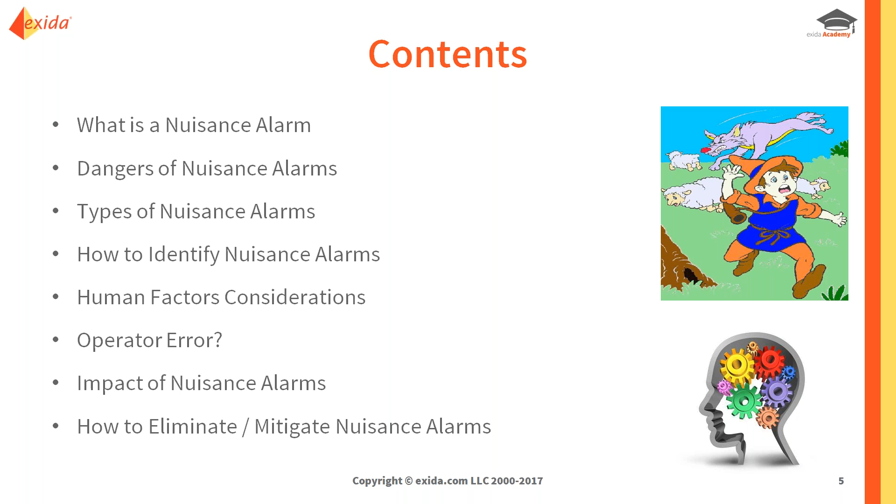For example, how it impacts or creates operator error, and whether operator error is really a root cause of a problem. So let's get started.

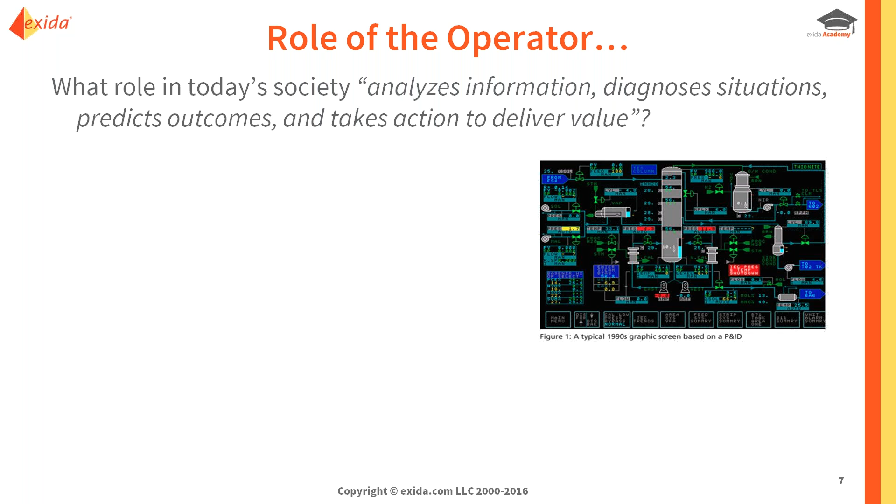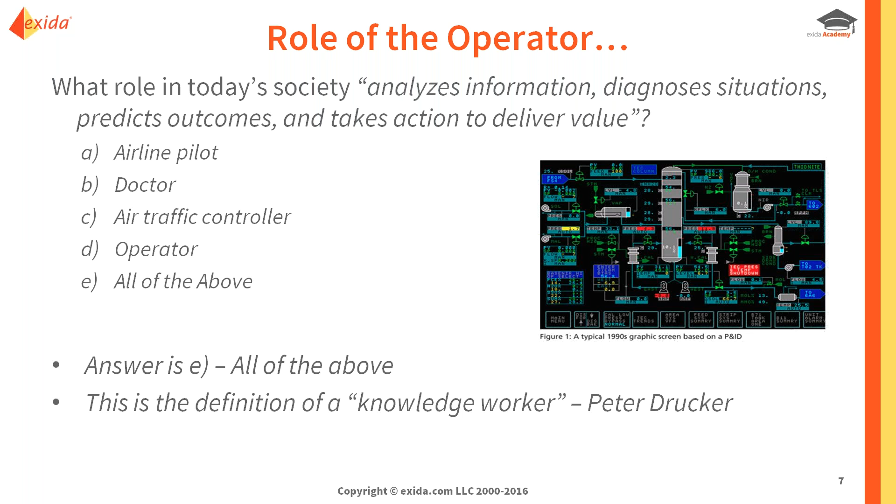First, a question to look at and understand the role of the operator in a process plant. So what role in today's society analyzes information, diagnoses situations, predicts outcomes, and takes action to deliver value? Is it an airline pilot, a doctor, an air traffic controller, an operator, or all the above? That's a pretty easy gimme question, of course. And the answer is all of the above.

The idea of this question is to get you to see how the operator is similar in their role to, let's take an airline pilot or a doctor. They take in a lot of information, a lot of data, and they need to make quick decisions that affect the bottom line of the operation, or the safety of the passengers per se, or the safety of the patient.

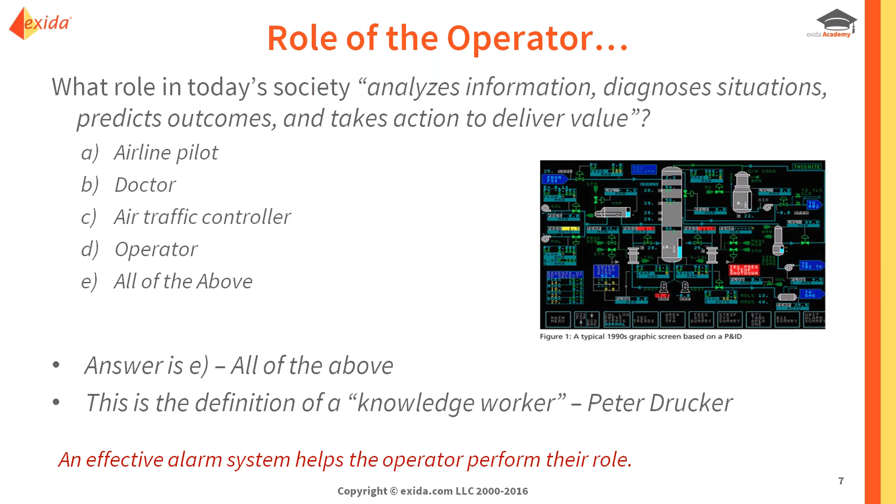So the alarm system is actually a key tool to help the operator do their job, and that's part of what we're going to talk about. So the alarm system is key tool for them to do their job, and alarms are part of that and help the operators know what to do and when. Now, what is the purpose of an alarm?

If we look at this schematic of a typical process upset, during normal operations, the distributed control system is pretty much typically able to keep the process in your normal operating range. However, in some cases, you'll have an upset, a piece of equipment will malfunction, change in operating conditions, all kinds of different reasons that the process will start to deviate and go out of the normal operating range into the abnormal area.

That is when we want an alarm to occur. We want that alarm to indicate to the operator that an abnormal situation has occurred, requires their attention, and that it will guide them to take the appropriate action. And if the operator does that, the process will turn around and go back to the green area, go back to the normal operating range.

If the operator does not respond or does not respond in time, the process will continue to deviate and go out of the abnormal area into shutdown. So that means a consequence will occur, whether it is truly a process shutdown, an SIS activation, or some other kind of consequence. The idea is if the alarm is not responded to appropriately, we end up in that area.

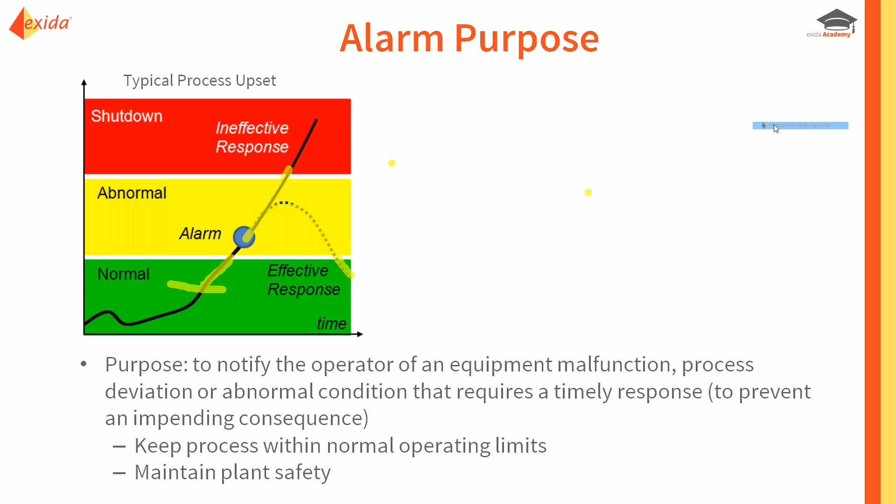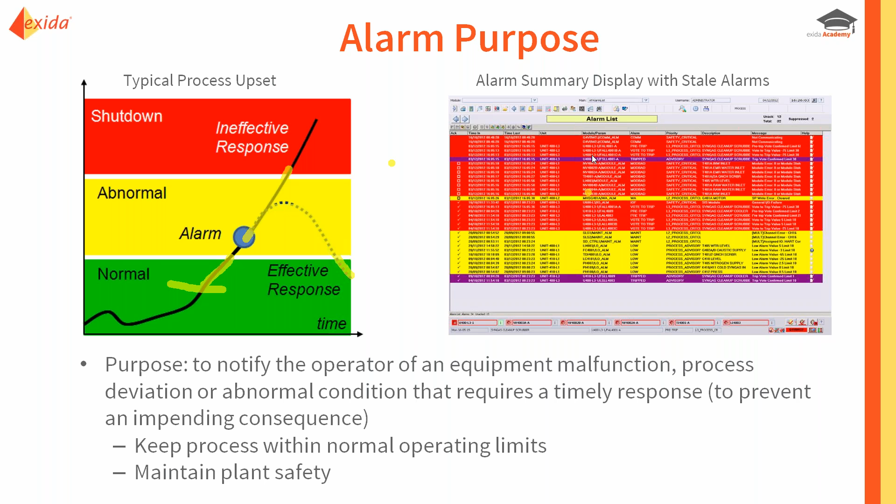That's what alarms are supposed to do. But how often do we see scenarios in a process plant where your alarm summary displays are full of alarms, full of stale alarms, alarms that don't disappear, alarms that are constantly on the console. This is an example showing we deal with alarm summary displays that are full from top to bottom, even continuing on to the next page, because they're so full of stale alarms.

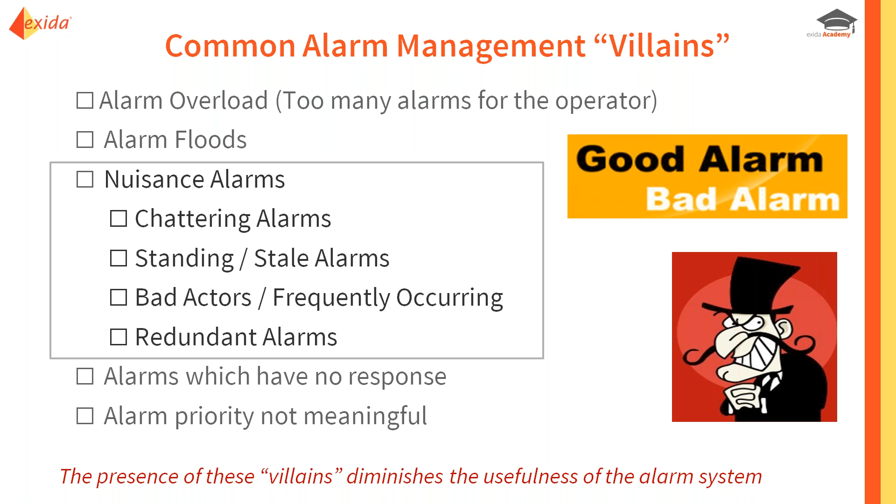So what we are talking about then is, in this scenario, nuisance alarms. There are many different issues, or alarm management villains, that can rob the operator of the benefit of the alarm system. In this seminar, we're going to focus on nuisance alarms.

So let's talk about what a nuisance alarm is, the definition. It is an alarm that annunciates excessively, unnecessarily, or does not return to normal even after the correct operator response is taken. So what does that mean?

That means if you're an operator and you have a new alarm that annunciates, chances are you will respond to that appropriately based on your training the first time that alarm occurs. So let's say you take that response and the alarm doesn't clear. It doesn't go away and nothing happens. Then the next time that alarm occurs, maybe you follow the same pattern.

But at some point, when the alarm occurs, knowing that the alarm doesn't clear and nothing happens, you're going to start to ignore that alarm. And if you ignore the alarm and no consequence occurs, then it becomes fixated in your mind that that alarm is a false alarm or a nuisance alarm. So that effectively desensitizes the operator to that particular alarm, and then in general to all of the alarms from the alarm system. That's a practice or mentality we want to try to prevent.

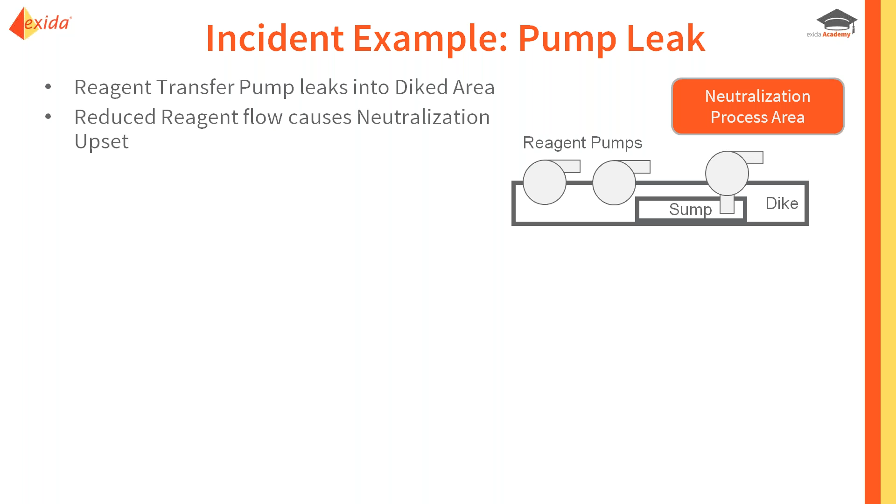We have a set of pumps, reagent pumps, that are transferring fluid into a neutralization process area, and those pumps develop a leak. That leak continues, creating alarms both in the sump area and in the neutralization area. The operator focuses on the upset in the neutralization area, trying to resolve what's going on and take care of the situation.

We have a high level alarm in the sump, and the operator ignores it, focusing only on the neutralization area. Because they don't have a good understanding of the process, they ignore the impact of the sump or feed area, thinking that because it's been a nuisance alarm, there's no need to consider it in the diagnosis and corrective action. So they're not able to correct the process problem.

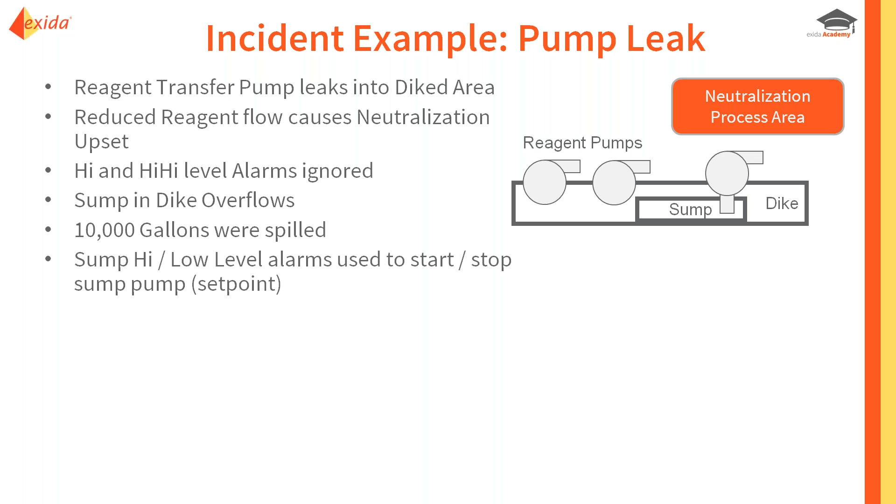Next shift, a new operator comes on and notices that 10,000 gallons have been spilled into the environment. So we wrote a paper and did an analysis of that, looking at the failure mechanisms.

One of the main problems was that the sump, the way it was designed, the alarming, the high level alarm would go off every time the pump turned on to indicate that, so it was used as the pump set point as well. So the operator got accustomed to ignoring that alarm. Then when a high level alarm comes from that same area you've been ignoring, how do you know whether you should respond to it or not?

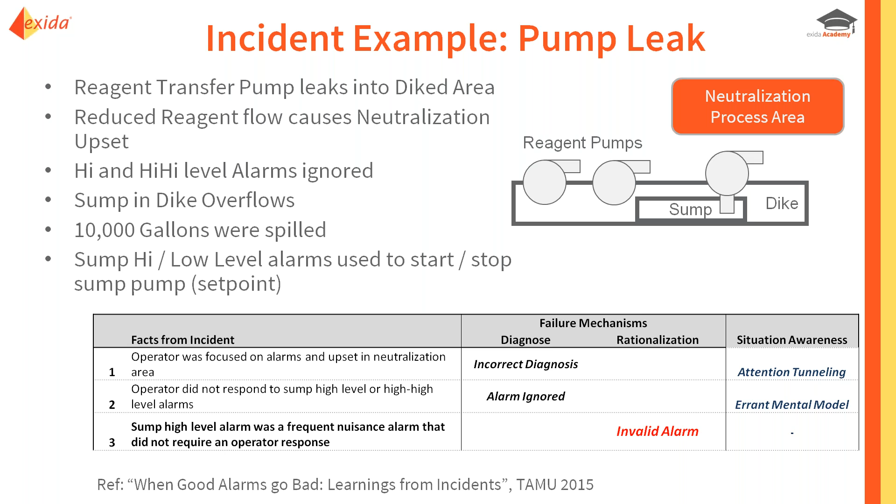The operator basically ruled that out as a source, and their attention was tunneling into the neutralization area only. Because they discounted the sump area as the potential source, their mental model of the process, their understanding or linking of causes and events, was not correct, and they were not able to respond correctly. But it all goes back to the fact that they were presented with high-level nuisance alarms that caused them to ignore that alarm in general.

So how did we get into this situation? Well, in the olden days of panel board control, there was a lot of thought and effort put into what points should be alarmed, because there was a real cost and limited real estate in the control room. Fast forward to today's modern DCS, and alarms are essentially free.

They're in software. It's just a simple checkbox to enable a deviation, rate of change, or high alarm without thought about whether they're truly needed. And if you're not sure whether you need an alarm, what do people typically do? They enable it just to be safe. Unfortunately, that has led to an overabundance of alarming where many alarms don't have a good basis, which has led to nuisance alarms.

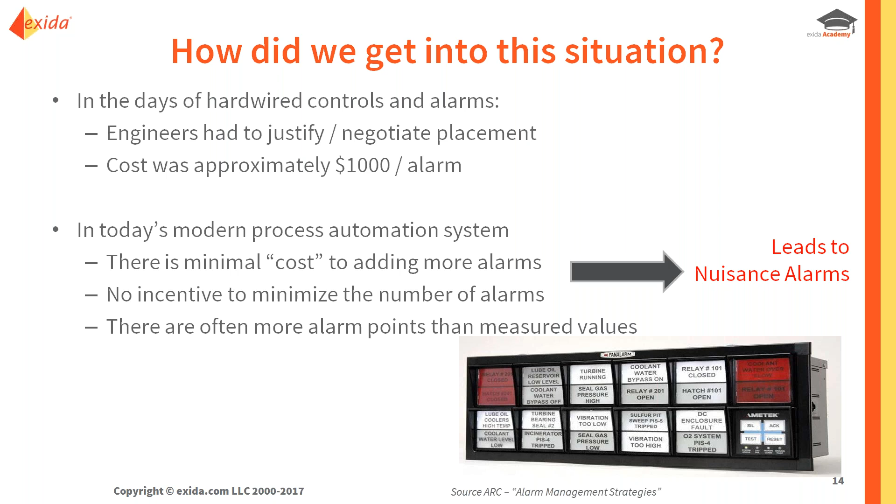The way we solve that problem, or one of the key ways, is to go back to the methodology we used to use: for each alarm, make sure we establish what the purpose is and what the operator is supposed to do. In today's world, we call that alarm rationalization, and we'll see how that fits in later.

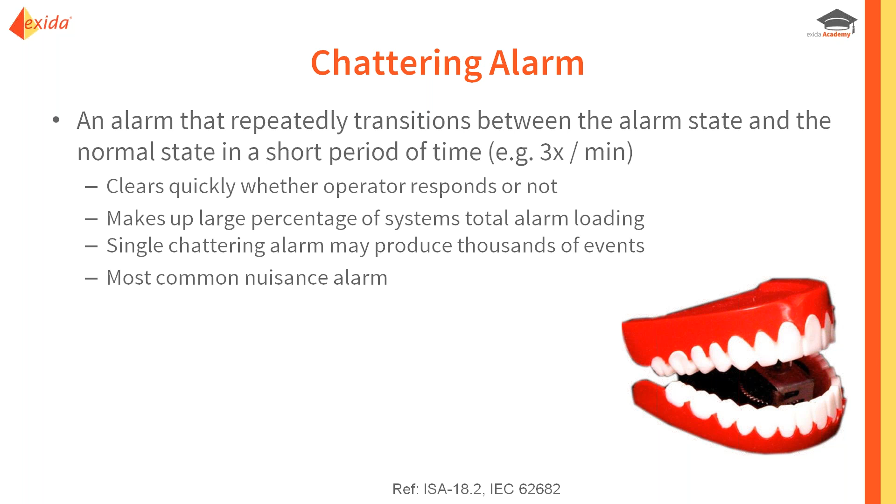Now let's talk about the different types of nuisance alarms and how we identify them. The first type is called a chattering alarm. This is an alarm that goes in and out of alarm with a high frequency, for example 3 times in 1 minute. This can become very annoying. It's a real alarm perhaps, but the fact that it goes in and out of alarm can be annoying to the operator and create many events. It will also clear without the operator even doing anything, going into alarm for a couple of seconds and maybe clearing right away.

Another similar type of alarm is called a fleeting alarm. It just does not repeat immediately, but otherwise it goes in and out with a short frequency as well.

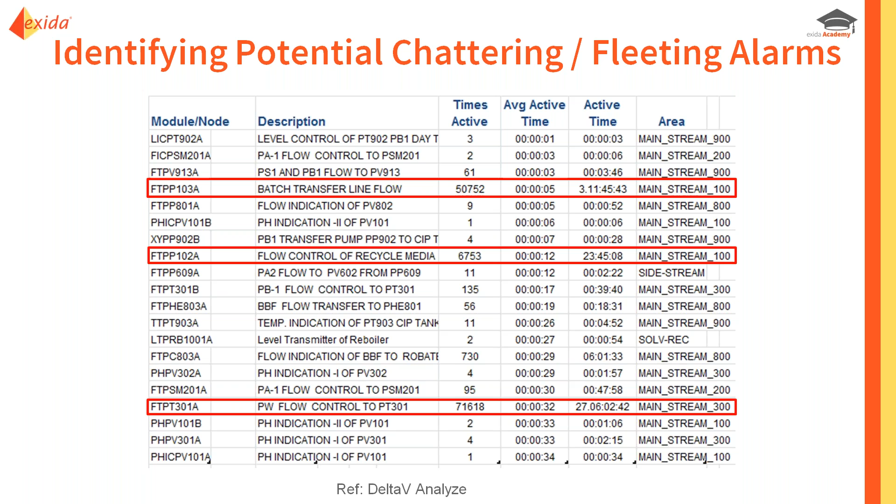So you can imagine what this does to your cognitive thinking process.

Another type of nuisance alarm is a standing alarm. We characterize it as a nuisance alarm when the alarm has been active for a long period of time, and we'll establish that period as, let's say, 24 hours. We call those stale alarms. Those were the alarms I was referring to earlier, the ones that are always displayed on the console. When you go into a typical control room and look at their alarm summary display, if you scroll all the way to the bottom, you'll probably find some alarms that have been there for weeks, months, or even years.

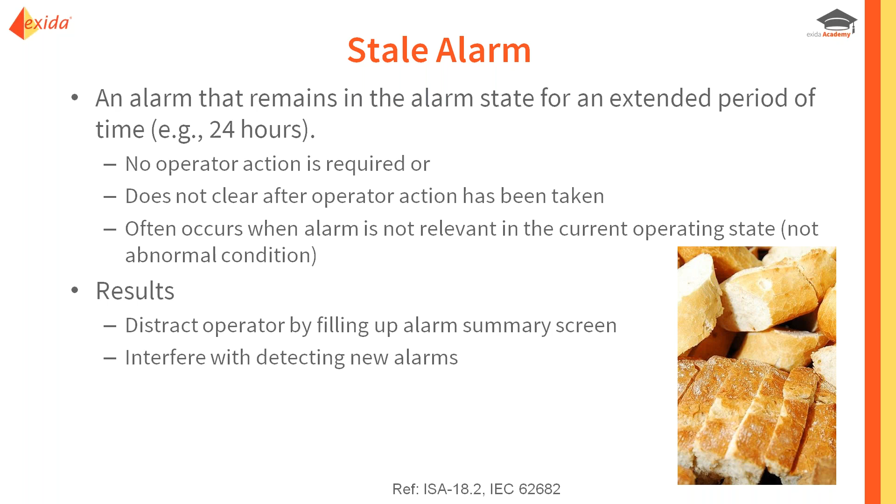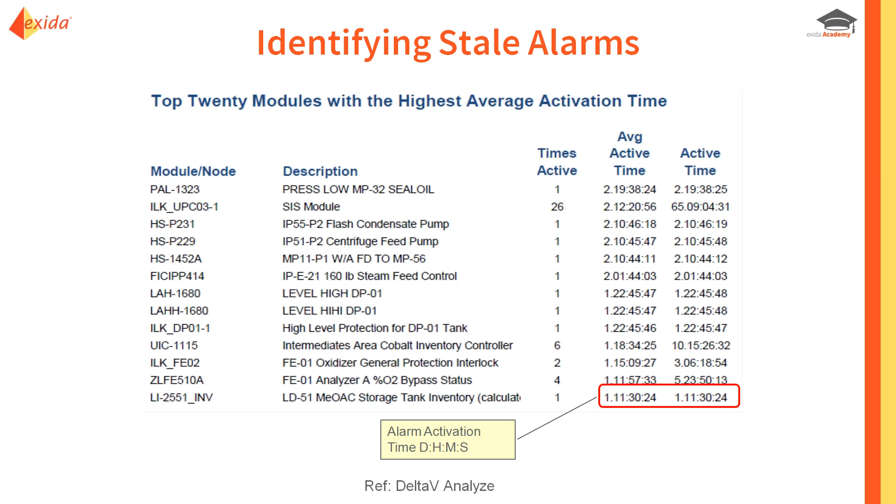So obviously they're not serving any purpose, and they are actually detrimental because they are clogging the alarm summary display, making it harder for the operator to see new alarms come in. So again, an example of being able to identify these stale alarms with the idea that we want to figure out what's happening so we can correct them. Part of what may cause a stale alarm, other than it being a poorly designed or inappropriate alarm, may be that the alarm setting is not correct for the mode of the process. So if you're making different products, for example, you may find that you get an alarm because it's not set up correctly, and that alarm stays there for the entire time the operation is in a certain mode. So that can create stale alarms, and we'll talk about how to address that.

Now, related to auditing, I wanted to throw in a couple of slides and thoughts about that. In the UK, the Health and Safety Executive, as part of their questionnaire or toolkit for their auditors, includes information about how well the alarm system is working, including a question about nuisance alarms and whether there are nuisance alarms present in normal or upset conditions.

How do you think an auditor would check to see whether you have nuisance alarms? The easiest way is to look at that alarm summary display. And if it is full, and the alarms are not changing, and you look at the date timestamp and they have been there for a while, then they know quickly and easily that you have a nuisance alarm problem.

We've seen similar scenarios occur in the US from companies that have been audited by OSHA or the FDA or their insurers, where an auditor will come in, not necessarily focusing on the alarm system, but in the control room they notice the list of all the alarms on the summary display, and they start to investigate. They start to probe into it.

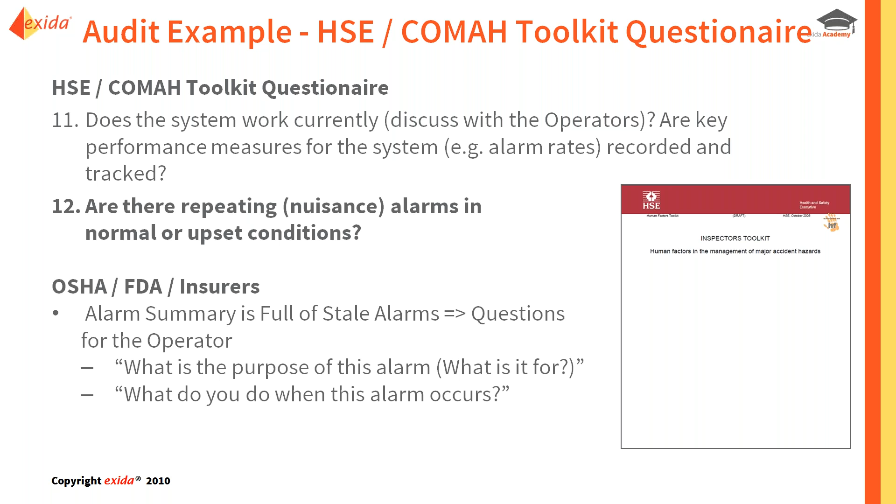So one of the key takeaways from this is that nuisance alarms are one of the easiest alarm management problems for an auditor to detect. So all the more reason why you want to focus on getting rid of them.

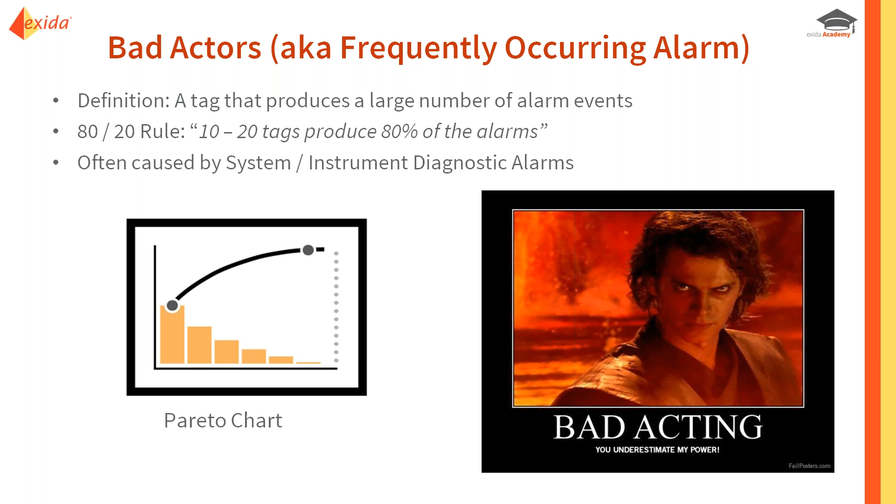Another type of nuisance alarm is what we call bad actors. These are frequently occurring alarms. You'll typically find in an unrationalized system that there's maybe 10 to 20 tags that create the majority of the alarm annunciation. So 50%, 80%, it kind of follows a Pareto distribution. So your control system may have 10,000 configured alarms in it, but there may be just 10 alarms that cause 80% of the annunciations to the operator.

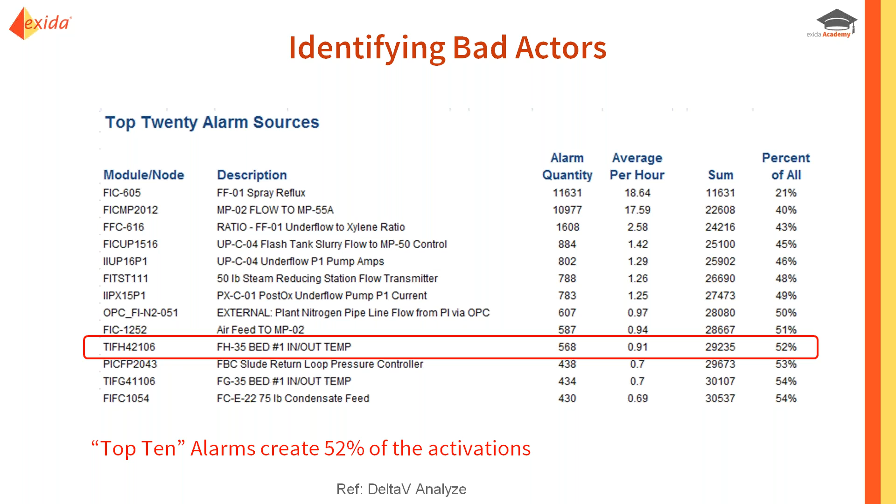So you can imagine if you can identify those bad actors, they become the alarms that you choose to fix first and right away to help the operator's performance. In this example, we can see that there are 10 modules that, if we just focus on fixing the alarms associated with them, would reduce the alarm activations by 52%. So significant benefit for doing that.

Another type of nuisance alarm is redundant alarms. This relates to the situation where we have one event, one upset, one abnormal situation, and we get multiple alarms. They either occur at the same time or maybe they're slightly time sequenced. It's kind of like a set of dominoes.

Once one alarm occurs, it causes another one, which causes another one, which causes another one. That frequently happens when you have equipment that is interlocked together from a logic or configuration point of view. They're naturally tied together, and when something happens automatically or something is triggered, that results in other state changes, which result in multiple alarms, all essentially indicating the same thing, and that's the problem.

So how do we eliminate these alarms, or what do we do? How do we create a program? Well, the IEC standard and the ISA standard have established some metrics or KPIs to evaluate yourself against when it comes to these nuisance alarms. And we can see 3 of the categories that we just talked about.

The top 10 most frequent alarms, the bad actors, should be less than 1 to 5%, or on the order of 1 to 5%. The quantity of chattering alarms ideally should be 0. The quantity of stale alarms, and this is an important one, less than 5 present on any day with action plans to address. So that would mean if we're looking at your alarm summary display, those old alarms, you should have no more than 5, and ideally you're trying to get rid of all of them.

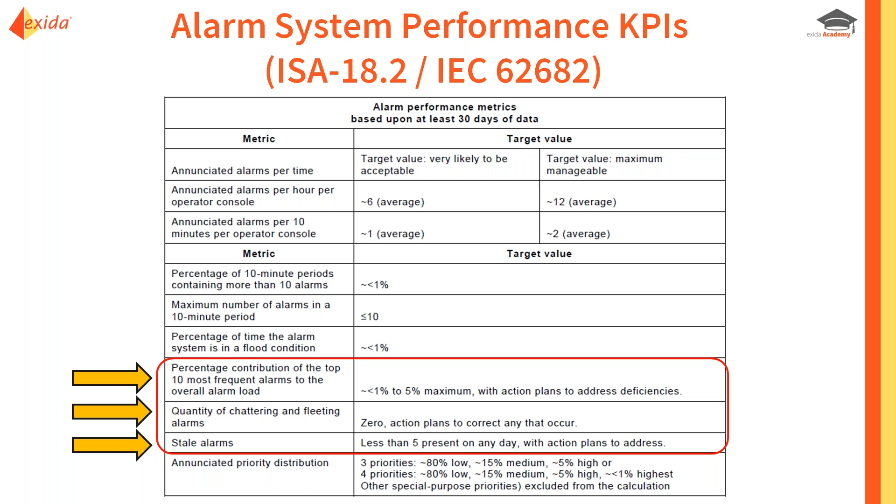So that provides some vision to where you need to get to when it comes to resolving nuisance alarms.

So now let's change gears a little bit and talk about human factors as it relates to nuisance alarms. So the IEC standard, or the ISA standard 62682, defines an operator response model. So what does it look like? It's really, you can think of it as 3 different steps.

The first step is that the operator needs to detect that the alarm is present. The second step is they need to then diagnose what is the problem and figure out what is the appropriate corrective action to take. The third step is to take the response. And we don't mean acknowledging the alarm, we mean opening a valve, turning on a backup pump, something that will correct the process abnormality.

Now, if we think about where those three steps or those three actions can fail and what some of the common failure mechanisms are, we can see that nuisance alarms kind of impact all of those steps.

Certainly in the detection step, if you have nuisance alarms and if you have graphics not created to emphasize new alarms, it can be very difficult to see a new alarm come in. But if you have chattering alarms or stale alarms, that's going to make it hard for the operator to see that there's a new alarm present. So that could delay the amount of time or cause them to miss it altogether.

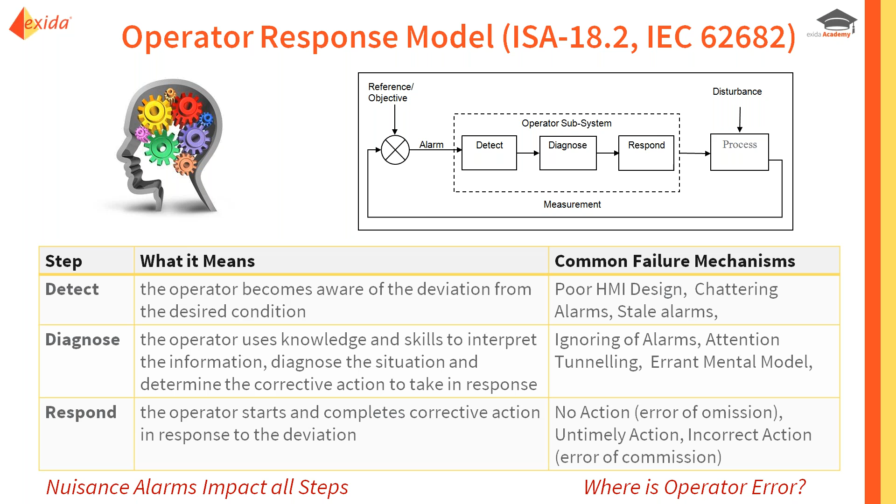The root cause related more to having those inappropriate alarms there. So I caution people not to jump to operator error as the problem or the root cause for something until we understand more about what the situation was like.

Situation awareness is a key element of helping the operator do their job as best they can. What is situation awareness? It means being aware of what's happening around you, and projecting and understanding what that means to you now and in the future. That means taking in your external cues, which can be the process data on your HMI graphics, or alarms, and figuring out what they mean, running that information through your mental model to comprehend what is happening now and to project that out into the future, as in what will happen if you don't take the appropriate corrective action.

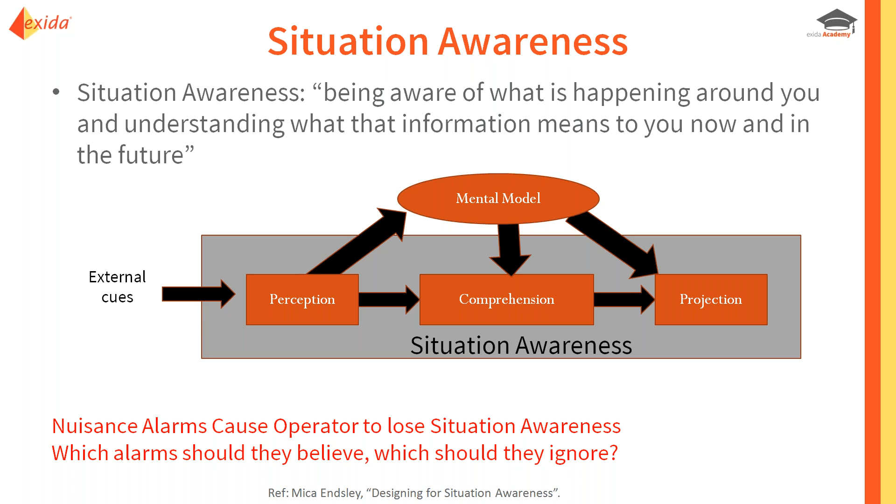So what do nuisance alarms do? Well, they're the input here, the external cues. How easy is it to develop a good mental model and have situation awareness if you can't even rely on your external cues, if you have to figure out which ones are real and which ones are false? That's essentially what's happening with nuisance alarms. We're asking the operator to truly understand and respond correctly, but we're giving them false information to begin with. So nuisance alarms can really impact situation awareness.

Now let's talk a little bit about alarms and signal detection theory as a way to also understand human behavior. If we look at these probability plots, we are showing the probability of noise distribution versus a true signal. What you'll find is that they overlap. There is a certain point that you set, or effectively gets set, that is the threshold for at what point you consider something to be a legitimate alarm. That would be everything to the right, or is not an alarm, everything to the left.

Part of the purpose of showing you this is that it may not really be possible to totally eliminate all nuisance alarms. If you look at this signal detection theory, to eliminate nuisance alarms we would need to reduce or change where this criterion gets set. So if we were to move it to the right to help get rid of the nuisance alarms, or the times we falsely detect an alarm, then what's going to happen? That's going to increase the area of a true alarm that we ignore. So in reality, in design of systems, there is a trade-off or a compromise between false alarms and true alarms.

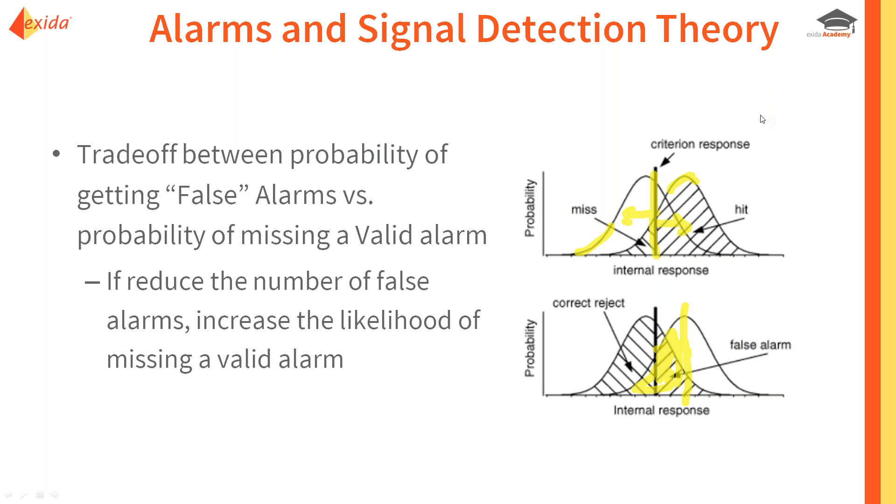So we have to keep that in mind. That doesn't mean we shouldn't be trying to eliminate as many alarms as we can, though. And what we'll see is that the impact of that is different depending upon workload. Just to make sure we're all on the same page, in general I think for a typical process plant, your operators are going to have a significant workload, either normal or overloaded. In that case, nuisance alarms are very detrimental, as well as missing alarms. But the more overloaded the operator is, the more impactful false alarms or nuisance alarms are.

If you look at the other end of the spectrum, if the operator was not overloaded, if they were actually underloaded, then false alarms or nuisance alarms actually may not be detrimental. They may actually help increase vigilance. So what does that mean? What's an example? Well, let's say you're an operator on third shift and you only get one alarm during your entire shift. That's good, but it may cause you to be very passive and not monitoring the system as closely as you need to be.

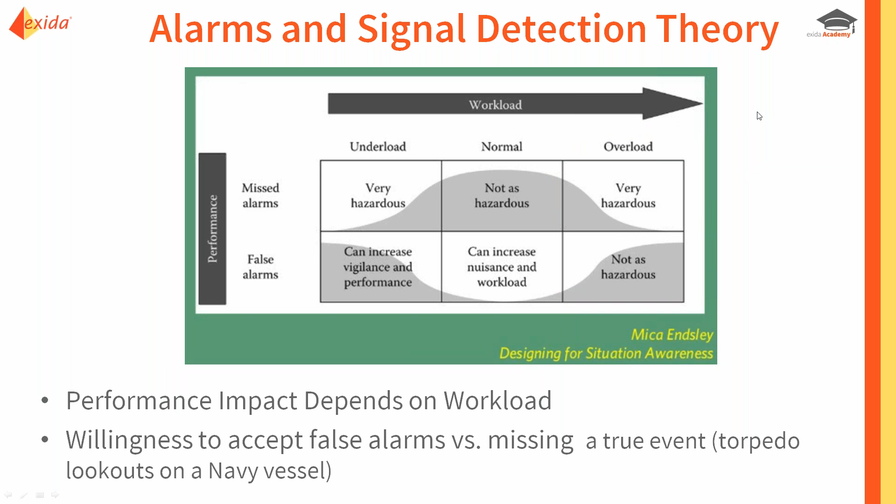So now what do we do with that? With understanding that there is some overlap between the noise and the signal. And when I say noise, I don't necessarily mean only audible noise. I mean noise to the environment of the operator in their ability to detect an alarm. So that could be audible noise, it could be talking in the background, it could be poor HMI, it could be bad lighting, it could be visual noise.

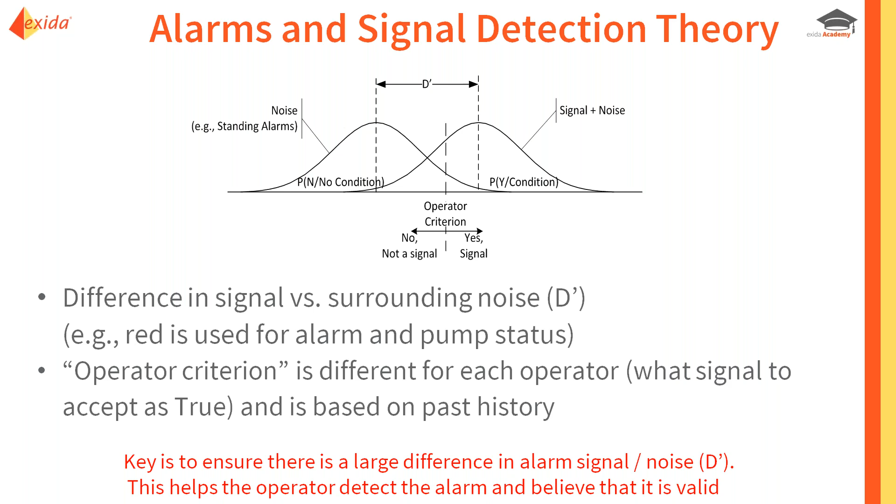One of the other things we need to take away is the criteria for where you draw the line as to what is an alarm and what is not is different for every operator, and it's typically influenced by past history. So if you are working with an operator that has been subjected to many nuisance alarms, their criteria for where they set the bar of what's a real alarm versus not could be very different from someone who is a new operator. So we need to keep that in mind.

Now, how does that impact actual response and the operator's thinking? One study found that if your false alarm rate, your nuisance alarm rate, is 25%—meaning 1 out of every 4 alarms is not a true alarm—that is sufficient to cause operators to stop relying on the alarm system as their means for detecting abnormal events. So 1 out of 4 is not a true alarm. There are many facilities that fall into that category or even worse. Something to think about.

Another important lesson learned was that the confidence in a particular alarm—say a new alarm comes in, maybe one that the operator is not familiar with yet or hasn't seen for a while—their judgment of the validity of that new alarm is influenced by all of the other alarms that exist and the number of alarms that are active. So if you have a screen full of stale alarms and you get a new alarm that comes in, the operator is going to be more inclined to consider that a nuisance alarm than they would be if the screen was empty of alarms.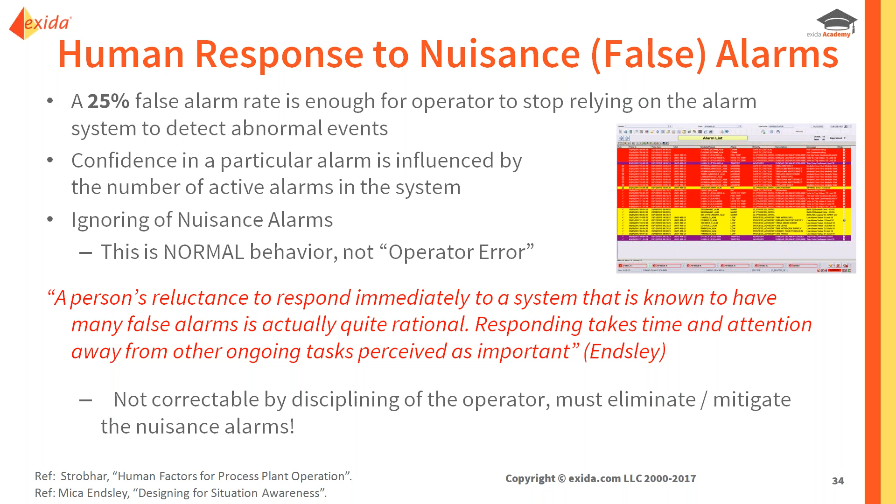So what does that mean? That means you cannot get rid of nuisance alarms or change that operator behavior by discipline or training them to say you must respond. That's not the way it'll work. You need to eliminate those nuisance alarms to begin with, because as I said, it's natural human behavior to ignore them. Now, how do those nuisance alarms impact operator reliability?

In the world of safety design, for layer of protection analysis, where we are analyzing the barriers that we have to prevent an incident from occurring, to prevent a hazard from escalating, alarms and the operator response to them can be considered one of those layers. It needs to meet some significant criteria to do it, and many companies thus do not use alarms as formal protection layers. But as part of that analysis, that needs to be assigned a reliability—what is the likelihood that the operator is going to respond correctly or incorrectly?

The reverse or the inverse is called the probability of failure on demand. A typical figure of merit there is a probability of failure on demand of 0.1, which means 10% of the time the operator is going to not be able to complete the response correctly.

That sounds like a pretty nominal value, but if we think about real life scenarios and look at the actual alarm system performance, we see that the alarm we're counting on the operator to respond to with high reliability is actually a nuisance alarm. Let's say that alarm from the layer of protection analysis is a safety alarm, or a safety related alarm as it's called in EEMUA.

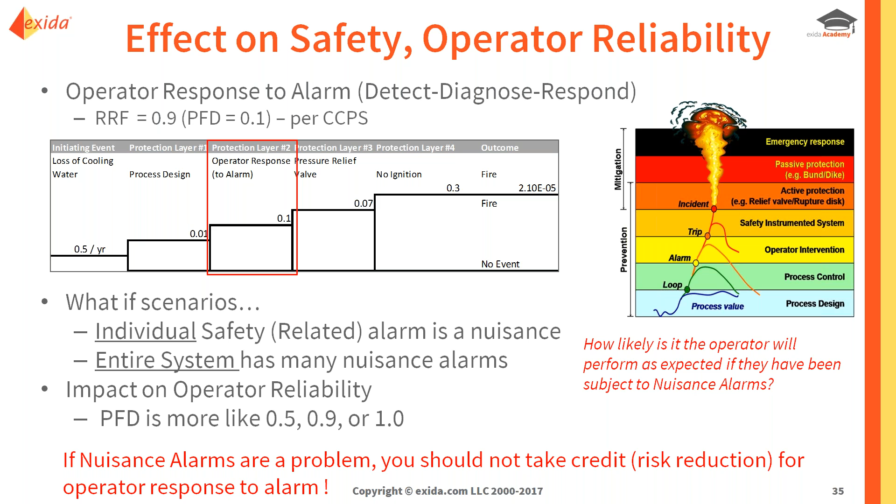If you measure your alarm system performance, which is something you are supposed to do, and you detect that either that individual alarm is a nuisance alarm or you have many nuisance alarms in your system, that may cause you to reevaluate the reliability of the operator's ability to respond. If you are taking formal credit for that as part of your risk reduction, you may want to rethink that. You may find that it's not really correct or a good practice to take a high reliability for an operator if they are subjected to nuisance alarms, because that is going to introduce significant issues for expecting them to respond in a reliable fashion.

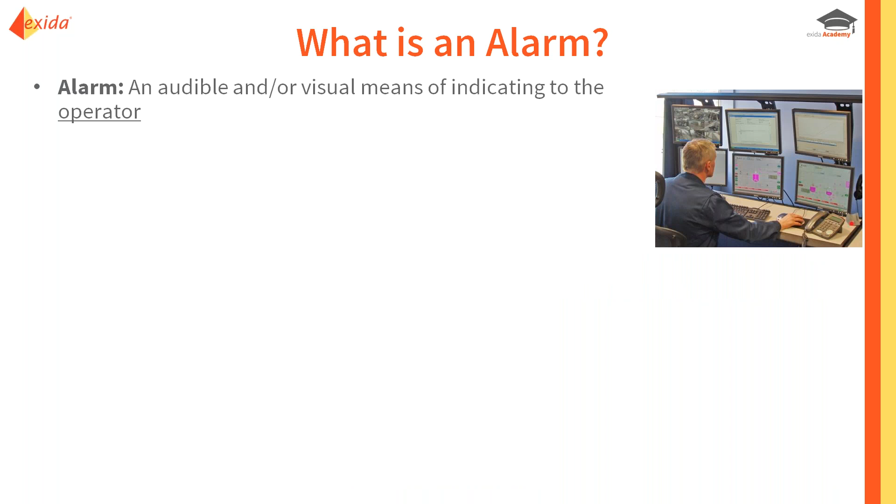So now let's talk about how we can eliminate nuisance alarms. First thing we need to do is remember what an alarm is supposed to be, a definition set in the IEC standard and the ISA standard. Alarms need to be relevant to the operator, understandable and actionable, need to indicate an abnormal condition, something is wrong, and also need to indicate that the operator must take a corrective action, some true corrective action.

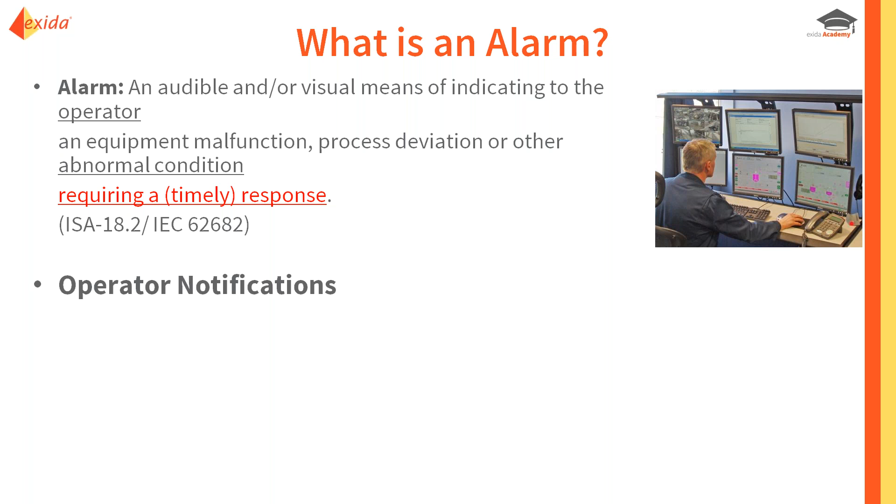One of the problems or initiators of nuisance alarms is that we are presenting things that are not truly alarms according to this definition. And by the way, the process of rationalization is to make sure that every alarm configured for the operator to see meets this definition.

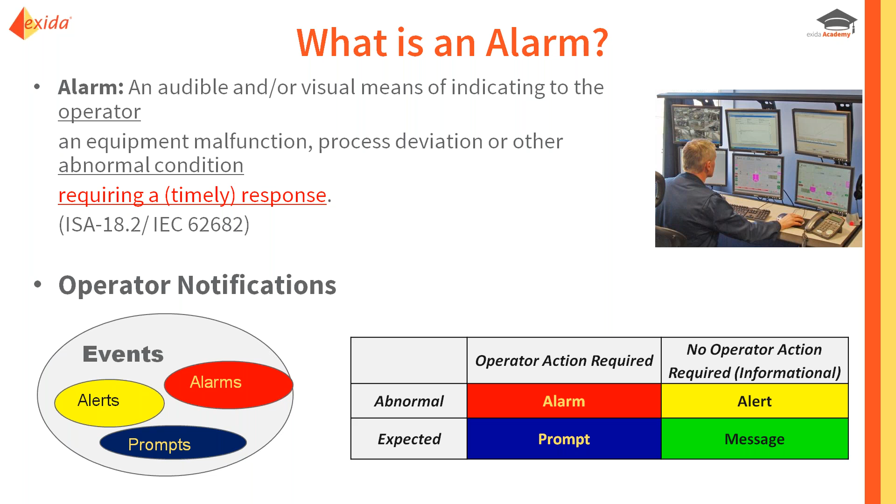But if you are presenting what we call here alerts, maybe it's an abnormal situation but the operator doesn't need to respond, it's just for informational purposes, that is a nuisance alarm in the scheme of what are alarms. So if you're presenting all that information to the operator through the alarm summary display, you need to segregate those notifications. Those other non-alarm types need to be presented to the operator via a different means, a different summary display, for example.

But the main way that we'll address nuisance alarms is through the rationalization process, which is a series of steps, including the first one: checking the alarm validity, determining the consequences if the operator doesn't respond, documenting the cause, corrective action, and documenting the amount of time the operator has to respond. Those are the things we look at first to determine whether something is a real alarm or not.

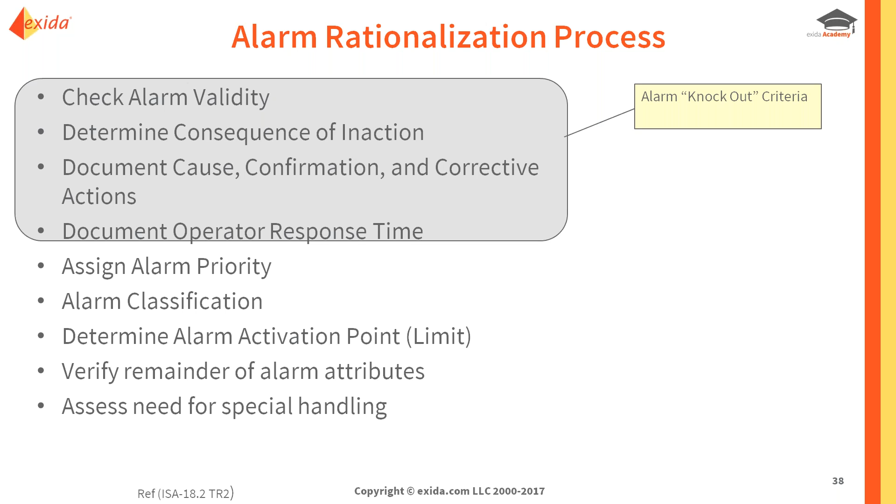And if it passes that test, we continue with the rest of the rationalization process, which includes assigning the priority, the classification, reviewing the alarm limit, setting on-delay, off-delay, deadband. We'll talk about those. And then the last step is to define whether there are any scenarios, states or modes of the process where the alarm either needs to be suppressed or perhaps have a different limit to act appropriately in that state.

As I mentioned earlier, we have a tool called SIL Alarm, which will guide you through the rationalization process as I've shown here, and help you document and capture the results for all alarms—so not just safety-related alarms, but all process alarms. So the first step in the rationalization process was to quickly check whether the alarm is valid or not based on criteria that we establish in our philosophy.

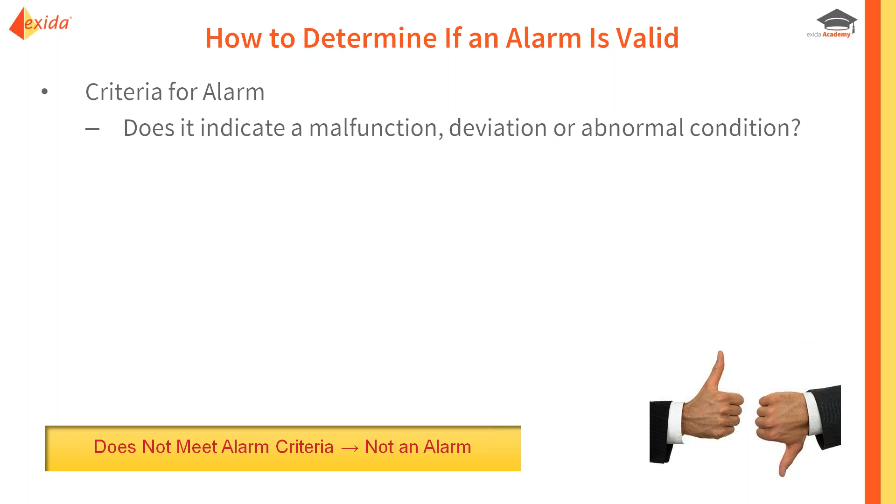If we take the criteria from the definition of an alarm, we could establish questions such as: first, does the alarm indicate a malfunction, deviation, or abnormal condition?

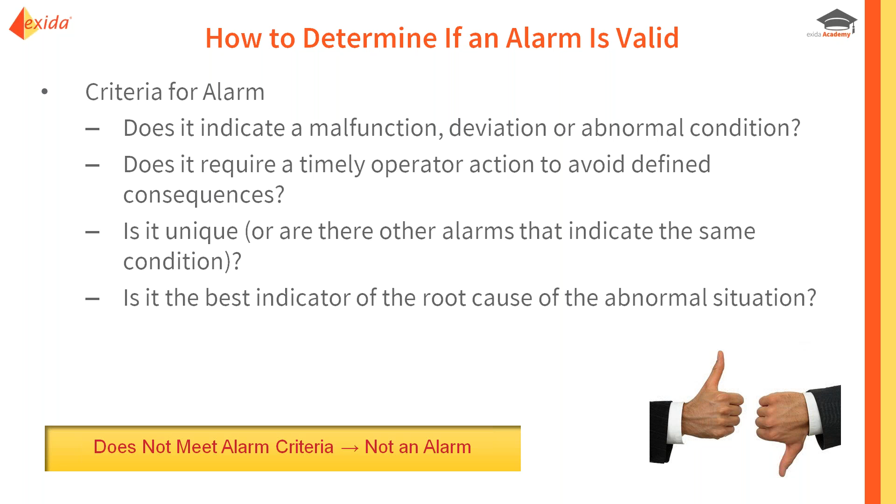That's a yes or no question. If we can't answer yes to that, it shouldn't be an alarm. Second, does it require a timely operator action to avoid defined consequences? Again, we need to be able to answer yes, or it is not an alarm. And here you see some other criteria as well: Is it unique? Is it the best indicator of the root cause?

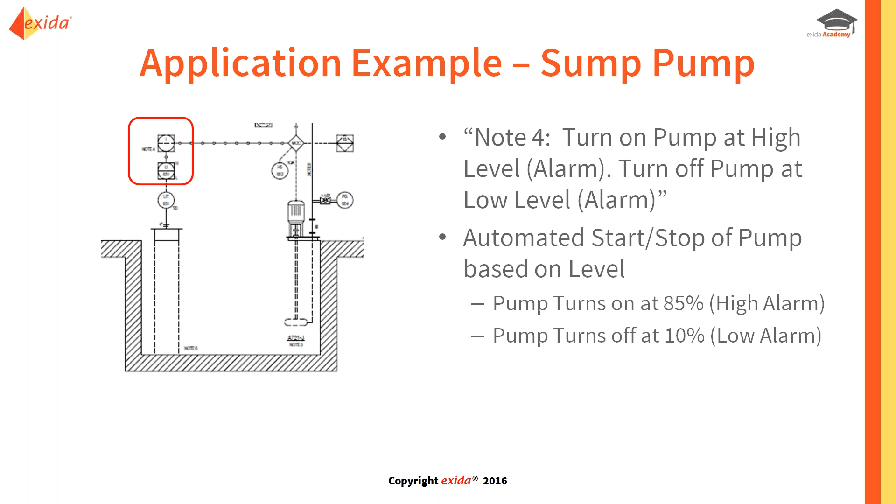So let's take that validity criteria and apply it to a common situation. We'll look at the way sump pumps are often designed, such as in the incident example we looked at. In this case, the P&ID says turn on the pump at the high level alarm and turn off the pump at the low level alarm. So it's an automatic start-stop of the pump based on level, where the set point is 85%, for example, for it to turn on. So that's the high level alarm.

So let's apply what we've just talked about to analyze that high level alarm. The first question is, does it indicate an abnormal condition? The high level in the sump that's being used to automatically turn on the pump - the answer to that question would be no. That alarm is only really indicating that the pump has turned on as it's supposed to.

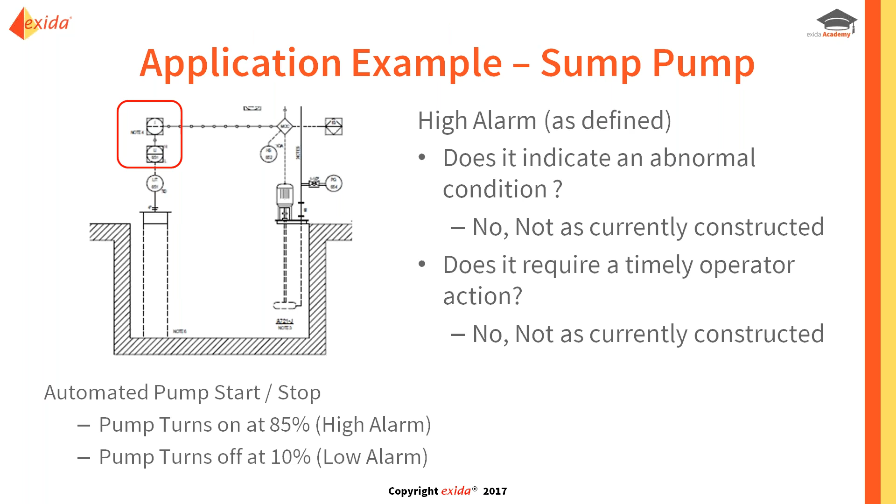Second criteria: does it require a timely operator action? What's the operator supposed to do? What do they do when that alarm occurs, when the pump turns on? Nothing - there is nothing for them to do at that point. So we've determined that this is not a valid alarm.

Then we would continue with the alarm objective analysis portion of rationalization: establishing the cause, making sure it's an unexpected situation, documenting the consequence - and we're after the direct consequence, not the ultimate consequence. So what is it that the operator's response would prevent? For this example, the direct consequence would be the trip of the SIS rather than the explosion or chemical release that you see there. We want to document the corrective action, make sure there is something for the operator to do, or else it's not a valid alarm. And then last but not least, potentially document the confirmation.

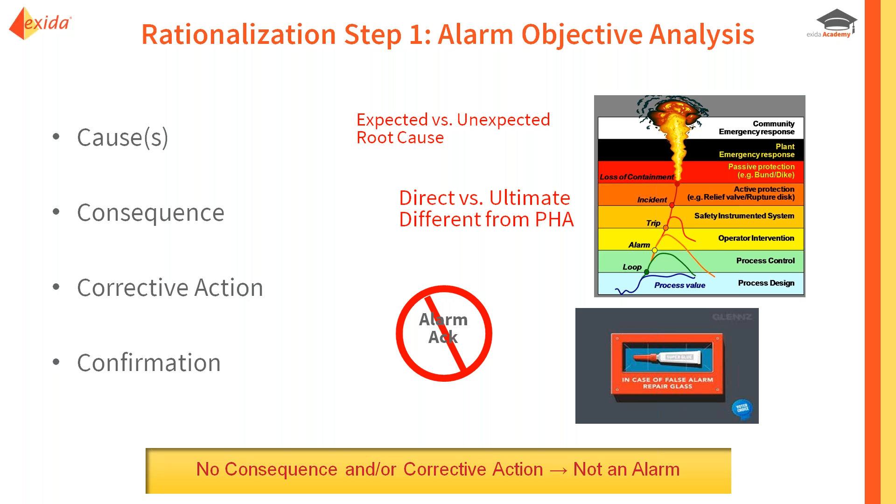Now, those of you that have done rationalization before are probably familiar with documenting and discussing the cause, consequence, and corrective action. But I want to talk a little more about the last one - confirmation, something new. What is confirmation for, or what is it? It's additional information, other process measurements that the operator could look at to determine that the alarm is real. It's a way for them to cross-check, to confirm that it is not truly a nuisance alarm or a false alarm, and that it does in fact require their response.

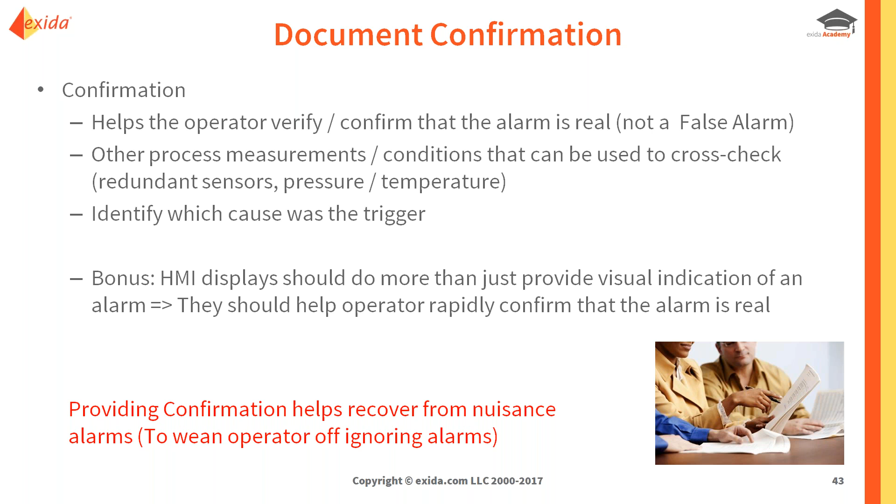So this is a significant thing to do - to provide them with this information as a means to wean them off of the practice of ignoring alarms. If you give them the ability, via this other information, to determine whether the alarm is a nuisance, a false alarm, or a real alarm, and they use that, then they will come to the correct conclusion about whether they need to respond or not.

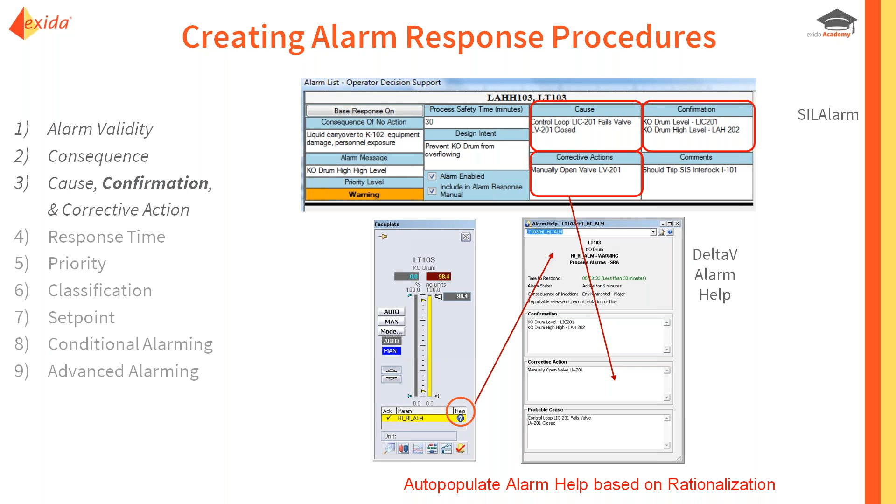So that information can be documented during rationalization. And then what we would recommend is to present that information or make it available within the HMI via what's called an alarm response procedure. It's the information on when this alarm occurs, what should the operator do, what's going to happen if they don't respond, what's the consequence, what are the likely causes, and how might they confirm the alarm is real. If you capture the information in our SILAlarm tool, that can be used to automatically create alarm response procedures, either in PDF format, or in some cases we can configure it in the DCS, such as here shown with an example from a DeltaV system.

One of the common questions that comes up is about redundant alarms - in this scenario, we're talking about both a high and a high-high alarm for a single tag. We want to get out of the practice of having a high-high alarm as a backup for the high alarm in case the operator misses it, or as a redundant alarm. That's not an effective alarm management practice. So what we want to do is define the criteria for when it's appropriate to have that high-high alarm.

So something about the two alarms, when you analyze them, high and high-high, or low and low-low, something needs to be different: either the cause, the consequence, or the corrective action. The operator response would be different in kind or degree. One of those three things needs to be different, or else the alarms are truly redundant and you don't need them both.

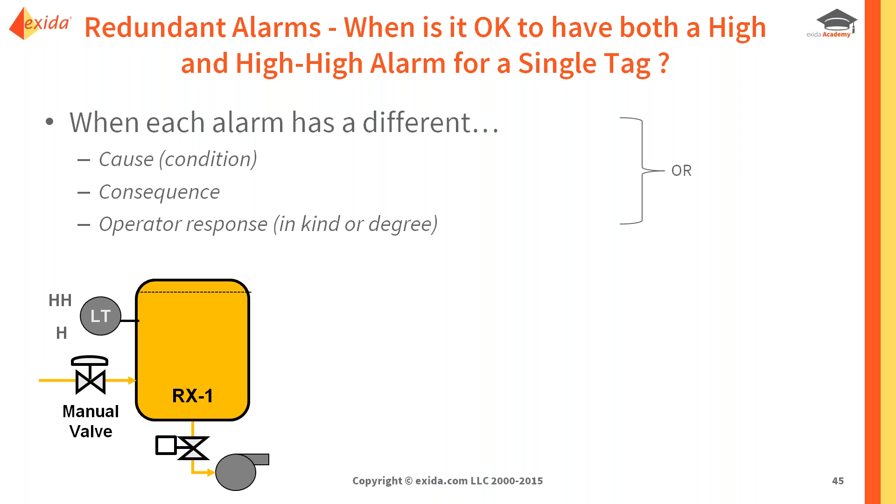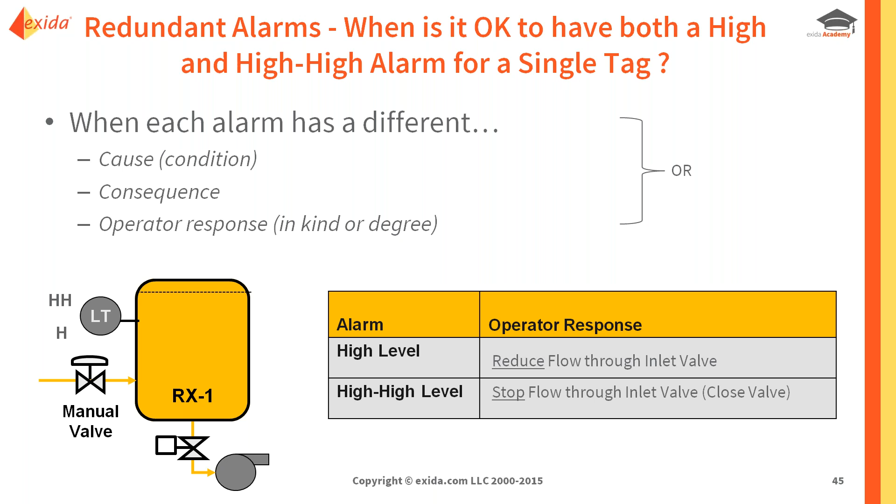Now, what do we mean about operator response in kind or degree? If we look at this tank level, and think about high-level alarms and how the operator would respond, if the operator's ability to respond is fixed on just the manual valve, when the high-level alarm is triggered, the operator response could be reducing the flow. Then if that's not sufficient and the level continues to rise, when that high-high level alarm goes off, the operator can close that valve completely, stopping the flow altogether. Those are two different alarms because the response is different in kind or degree.

Another redundant alarm example is the cascading alarm effect, when an automatic action occurs and creates a series of alarms, such as when we have a pump and alarms related to the discharge pressure or the outlet flow. If you don't do anything in your logic, it's very likely that you're going to get a low discharge pressure alarm or a low outlet flow alarm anytime the pump turns off or is stopped. But that's not a real alarm scenario.

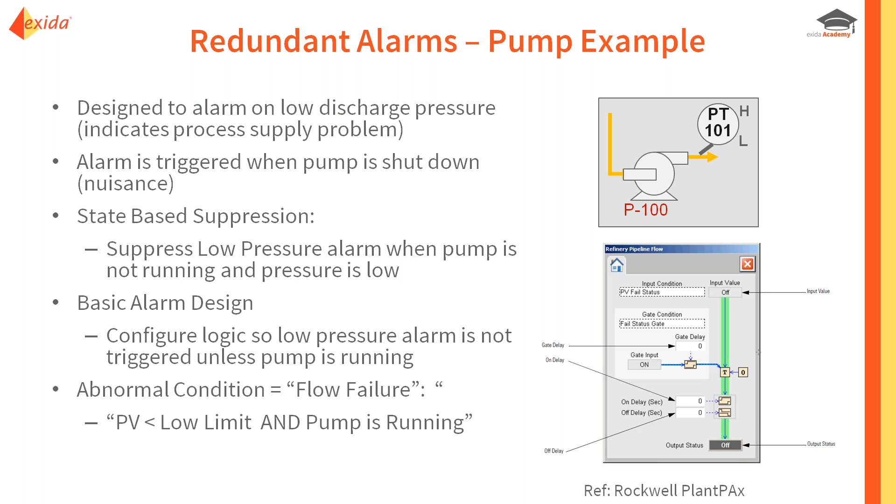So what we want to do is make the triggering of that low pressure alarm smarter, and not just look at the value of the pressure, because that can be low on purpose when the pump is stopped, but also incorporate reading and looking at the status of the pump itself. So we only want that low pressure alarm to be active and go off if the pump is running, because that's when we care about it. We can make that part of the annunciation of the alarm so that we don't just look at the pure pressure level, but also consider the status of the pump, whether it's running or not.

So that's redundant alarms. Now, one of the causes of nuisance alarms, particularly stale alarms, is if the alarm limit is just not set correctly. So how do you set alarm limits?

Well, if you go through rationalization, you have defined what the consequence is, and then you can say, well, at what point of the process, what value of the pressure for example, would that consequence occur? And if it's a relief valve, for example, we know what that setting is, so that forms the upper bound for where we want to prevent the process from getting to.

So we want to set the alarm limit in relation to that consequence and also in relation to our normal operating envelope, to make sure we're not setting the limit too close to the normal operating envelope, or else we'll certainly get chattering or nuisance alarms, and not too close to the consequence threshold, or else the operator may have insufficient time to respond. Now, as part of this analysis, if we find that the gap between the consequence threshold and the normal operating envelope is too small, then maybe it doesn't even support having an alarm.

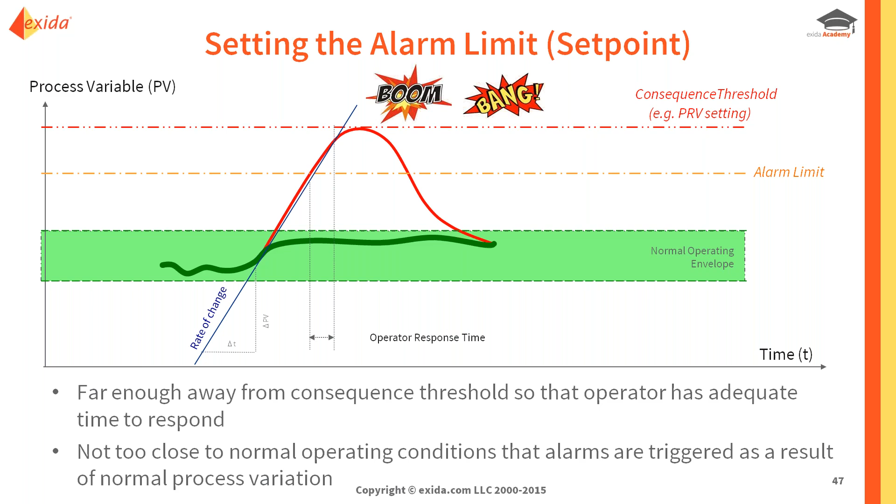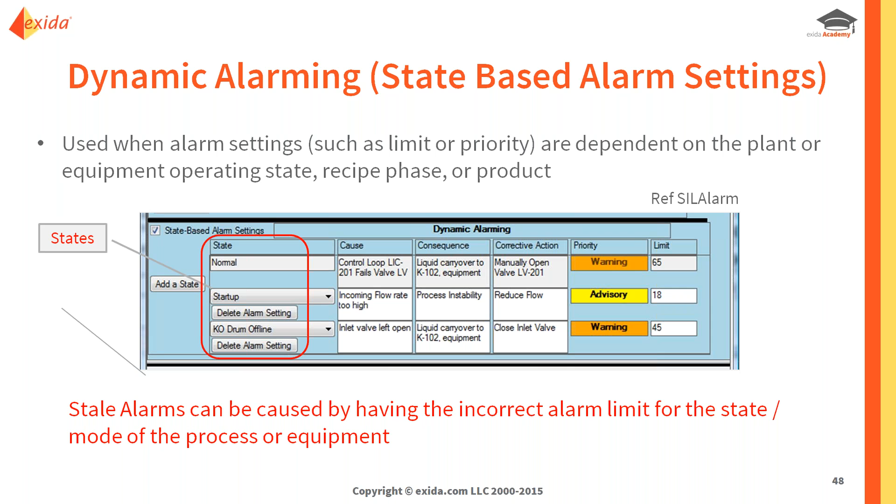So alarm set points or alarm limits can be the cause of stale alarms in some cases, and in some operations that's because the limit needs to be different depending upon the state of the process. This is showing how in our SILAlarm tool we can capture different requirements for the priority or the limit as a function of state. So if you have a stale alarm based on an incorrect set point as a function of operating mode, that alarm's not going to clear until you change to a different operating mode or dynamically change the set point. Assessing alarm deadbands and tweaking them is another key way to get rid of nuisance alarms.

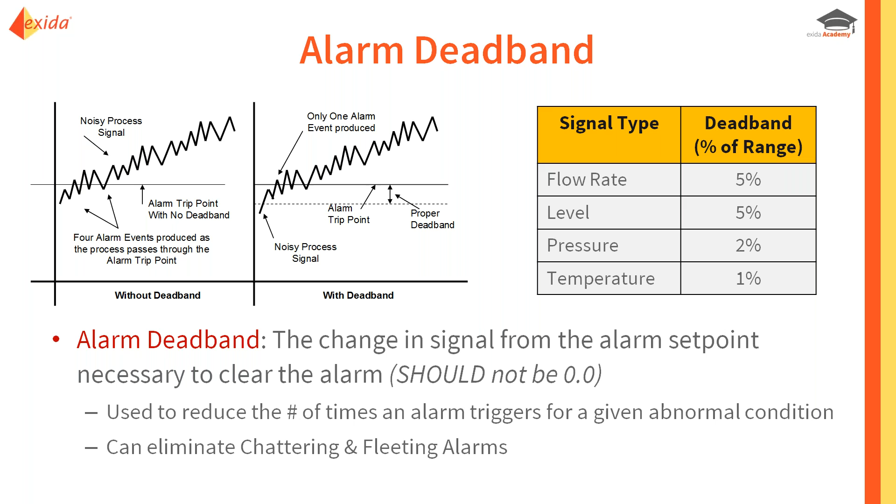That adds a buffer that essentially makes it so that the alarm needs to clear that amount before the state would be changed within the control system. So how does that work? If we look at an example, pressure that's scaled from 0 to 100 psig, we set the high alarm at 90 psig and we apply a deadband of 2%.

So now the alarm occurs as soon as the pressure goes above 90, and any fluctuations thereafter in the range between 88 and 90 do not cause the alarm to change state.

It doesn't clear until the value drops below 88. So that's how we smooth out the fluctuation and eliminate chattering alarms.

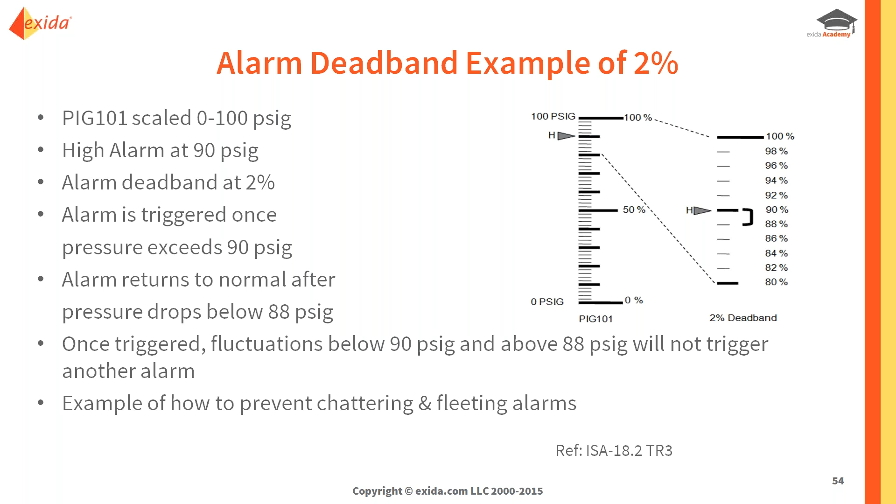Now you have to be careful when you're applying deadband, because if you set the deadband too big or set it inappropriately, that alarm may not clear, and you may create a stale alarm just because you've set the deadband inappropriately. Interesting real-life example of operators...

looking at their alarm summary display, knowing what the process value is currently versus the limit, and saying, you know, we've actually gone below the limit, but the alarm is still there. Why is that? That's because of the deadband.

It needs to clear that deadband. If the deadband is set incorrectly, as in too big, that alarm may not clear and it'll stay there as a stale alarm.

So in this example, the operators used to go into the alarm and change the deadband from whatever it was to 0, which would cause the alarm to clear, and then they would change it back to what it was supposed to be, all in an effort to eliminate the stale alarm.

So instead of changing the deadband to something more appropriate and analyzing or using other techniques, they would manually change the deadband to clear the alarm. One of those other techniques is implementing on and off delays.

This is a way to delay the annunciation of the alarm, till the alarm kind of makes up its mind, or the process variable makes up its mind that it wants to be an alarm.

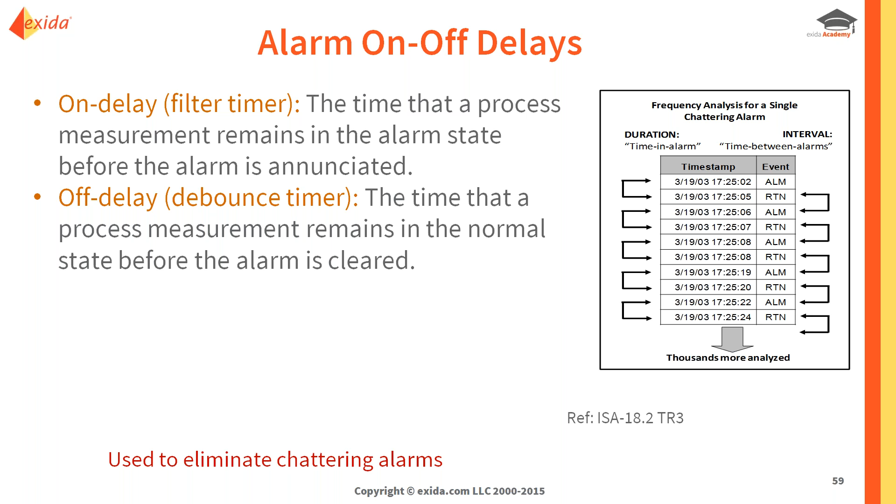So if it's not an alarm for 10 or 15 seconds consecutively, you don't annunciate it. Off delay is essentially the reverse of that. That also helps to get rid of chattering alarms.

There are recommendations in the ANSI/ISA 18.2 guideline. There are recommendations in the original ISA standard. I think they've been removed from the IEC standard, but typically these values are applied based on the type of process variable.

But when you apply them, there are definitely things to consider. Certainly you would typically apply the deadband first, because that's the most powerful, then apply the on delay, because that will get rid of chattering and fleeting alarms.

But you do need to be mindful of what on delay is. It's delaying the annunciation of the alarm to the operator. So if you have an alarm with a short response time, if you implement an on delay, you're essentially robbing the operator of response time. So you would need to be mindful of that.

Off delay can also be used, less powerful, typically used when the others don't have any impact. There was a study done by the ASM, primarily for plants in the UK, that found that just by tweaking these parameters that we've talked about...

we're able to reduce the alarm load on the operator by 45 to 90%. Pretty fantastic results. Another thing to keep in mind is the standards now require that the DCS provide both deadband capability...

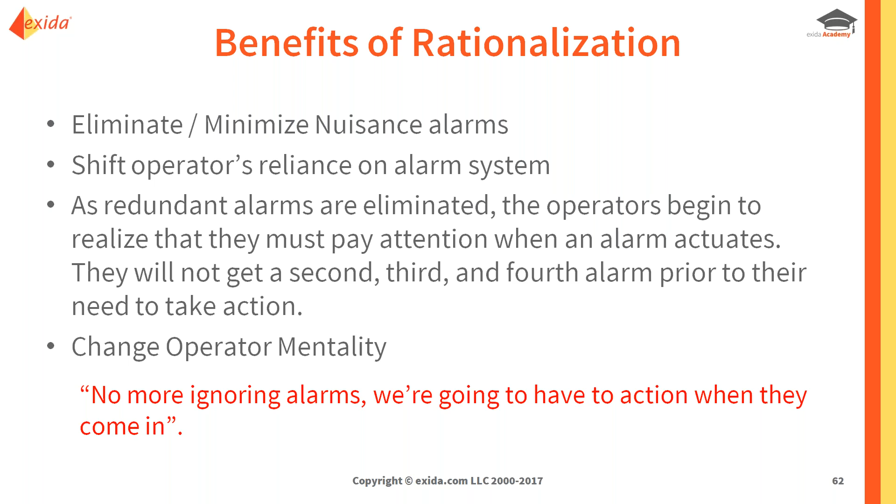So we want them to walk away with: there's no more ignoring of alarms. You're going to have to take action when that alarm comes in, because every alarm left after rationalization is significant and requires their action.

Now, one last thing: if there are nuisance alarms present and you haven't been able to get rid of them yet, it's not a good idea to just leave them blinking at the operator. So modern DCSs are now supposed to include the ability to shelve alarms. This is a way to temporarily suppress the alarm from the operator.

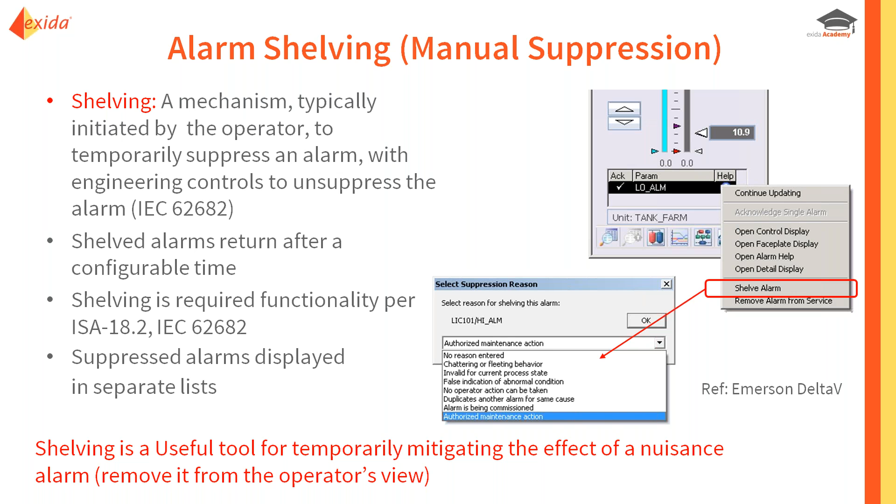Typically this is done by the operator, so it's under authorization and control. The alarm disappears temporarily, goes to a different summary display, and comes back after a period of time. So the idea is, if you have a known nuisance alarm, rather than making the operator deal with it and put up with it, you can temporarily suppress it, removing it from the operator's view and allowing them to better concentrate.

So in summary, what did we talk about? Nuisance alarms, the detriment, how they can impact the operator's performance and the way the operator thinks about alarms. Ignoring nuisance alarms, which is what often happens, is, as we talked about, normal behavior. The only way, or the most effective way, to change that behavior is to get rid of the nuisance alarms.

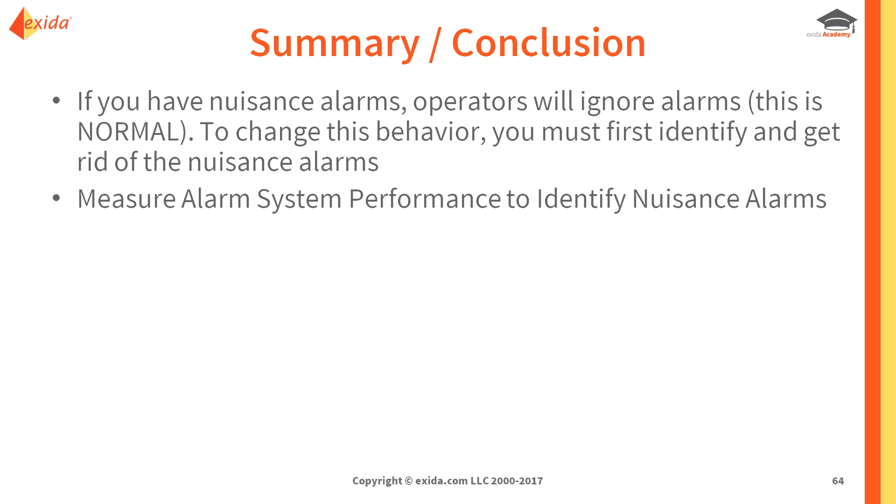Include your operators in the rationalization process. Disciplining is not the appropriate way to change that behavior. We want to be measuring alarm system performance so we can identify what nuisance alarms exist, then apply the mitigation techniques we talked about. Perform the alarm rationalization—get rid of alarms that don't belong.

As part of that rationalization, identify how the operator can confirm the alarm is real. Apply deadbands and on-off delays to get rid of chattering alarms. Evaluate the alarm limit, the alarm set point—does it need to be a function of the process state. Is it set correctly in relation to the consequence threshold? We want to make sure alarm set points are set correctly.

And for the scenario where you haven't been able to truly eliminate all nuisance alarms, which may not be possible, we want to provide the operator with the ability to temporarily suppress the alarm—that's called shelving. One final takeaway: if you have nuisance alarm issues and are taking credit, qualitatively or quantitatively, for operator response to alarms, you may want to revise or reduce that, based on the fact that nuisance alarms can impact the operator's reliability.

So it all goes together. That's how we bring together the worlds of alarm management and safety.